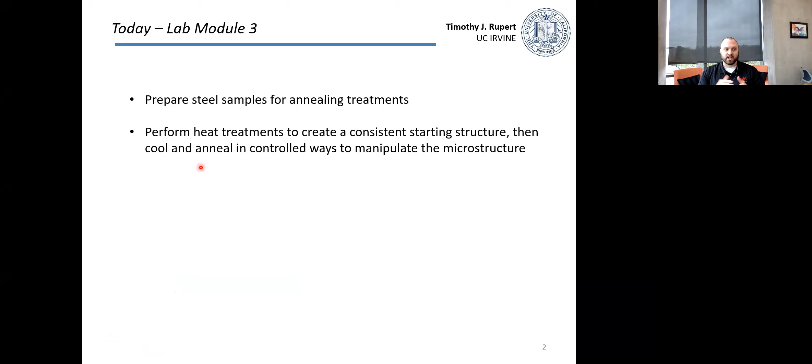So we're going to do this austenization treatment and make them all the single phase FCC material. And then we're going to cool and anneal in different but controlled ways to manipulate the microstructure. So first, in terms of the sample preparation, I just wanted to clarify the procedure that we're using. It's identical to what we did in our last experiments on the aluminum copper alloys.

So we have these chunks of steel. I'm showing little pictures of them on the left. This was just, again, this 1-inch diameter bar. It was a long bar. I cut it with a bandsaw, and that's a good place to start from, but we need to do a few things. On the right here, I'm showing this from the top down. We're looking at the surface, and then from the side, we can see that it's rectangular.

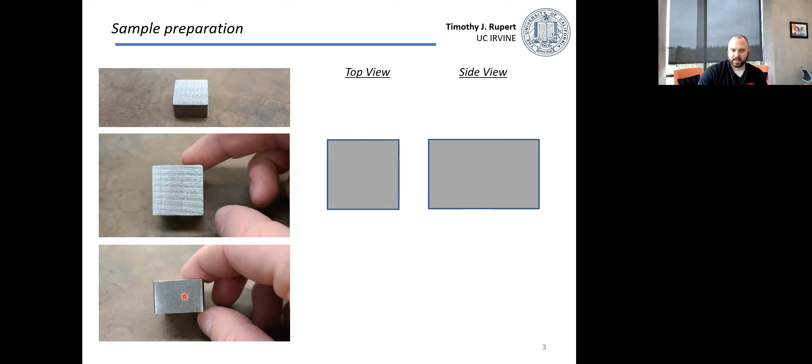All right. The first thing we need to do is polish this face. This is pretty rugged, and that's just how the saw cut it. We want to have a nice smooth surface so that we can do things like measure hardness and also etch that surface to look at the microstructure. Now, to help me get that nice polished surface, I'm also going to polish these edges, these corners in this picture on the right here.

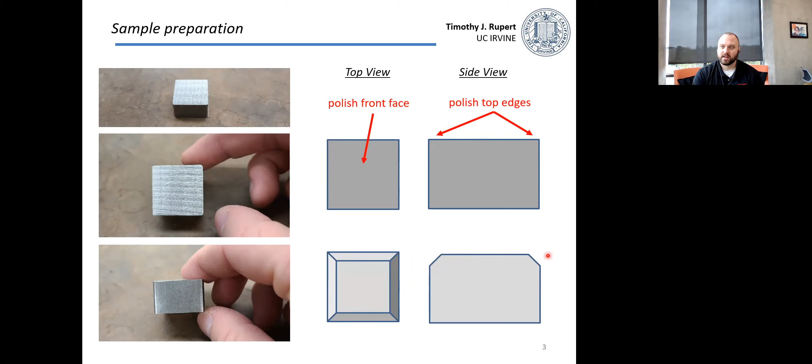The idea here is that I want to be able to smoothly wear away material from that surface, and it's very hard if I have a sharp edge at the side. Some material will get dragged along there, and I won't be able to get a nice surface. So what I'm really trying to do is have a sample that looks a little bit different. It doesn't just look like this rectangular prism shaped chunk. I'm beveling those edges. Here I can see it from the top and also from the side, so that I can then polish the sample and get a nice smooth surface.

Okay. So I'm actually going to show you a few videos of this. I'm trying to combine it all in one video at the end. So on slide 9, when you click the link, the first part of the video will show you me polishing this. And one thing that comes up compared to our aluminum is that steel likes to rust. So we have to be very careful when we polish. We're using water to lubricate that process. We want to make sure that we don't leave water on the surface and allow that to corrode.

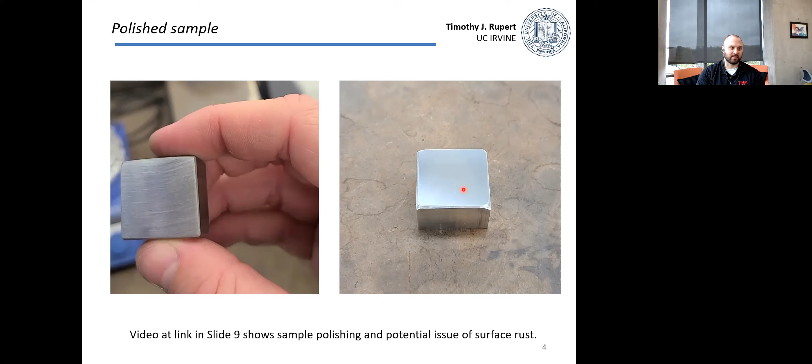Okay, so getting to our heat treatments, just a reminder, we're going to target 3 microstructures. We're going to heat everything up in this temperature range where it wants to be austenite. We're going to take one sample, cool it down a little bit, but hold it at a relatively high temperature so that we get a pearlite structure. We're going to rapidly quench one down to get martensite.

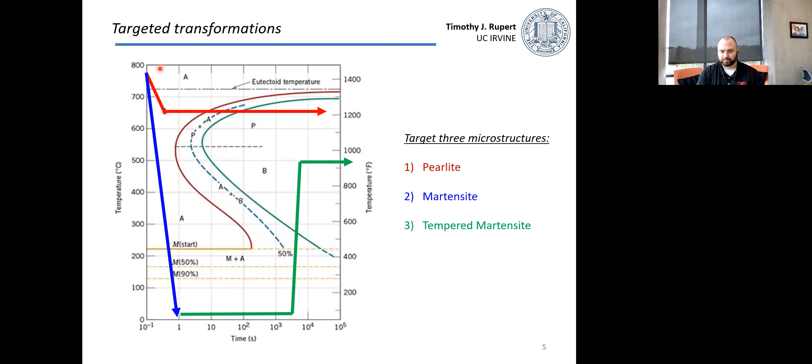We're going to rapidly quench a second one down to get martensite, but then let it do an intermediate temperature heat treatment to get a tempered martensite, to change the properties further. So we talked about all this in our last set of slides. So this is all pretty straightforward. So these temperatures and these times are things we got: the temperatures from the phase diagram, the times from these TTT diagrams.

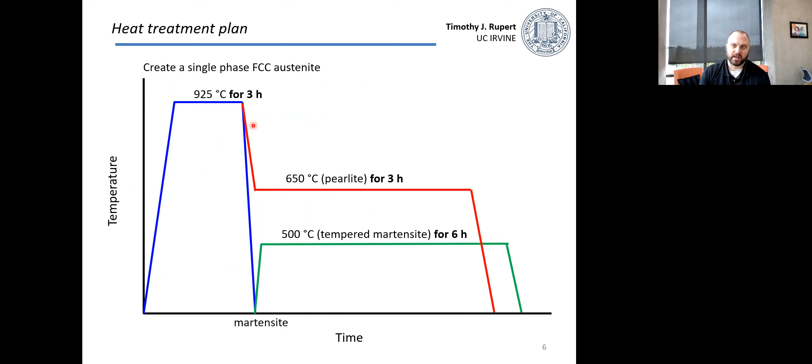The one practical thing we need to talk about today is how do we accomplish some of these things. So for example, the ramp rate at which we heat up doesn't matter that much. It's going to sit at this really high temperature, so it can just sit there forever. It's fine. But the rate at which we cool down in many of these cases is going to be very important, especially in the case of a martensite.

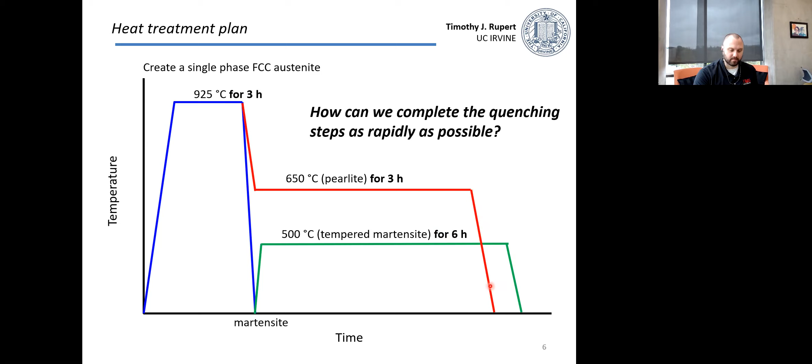So we want to not allow any of those transformations that the phase diagram predicts to happen. So we really need to rapidly quench it down as fast as possible. We want this curve right here to be as close to vertical as possible. And that's also generally true for after we do our pearlite and tempered martensite annealing treatments. We want to very rapidly quench these down and have a really high slope at the end. Okay. So we need to think about doing that.

And the first thing we can play with and change is our quenching medium. So what's the system and material we're going to use to bring that sample down from the high temperature? Generally, people want to use different liquids. So you could put your solid metal in this liquid and cool it down. But you have lots of options. You could really use any sort of liquid. And people do use things like oils and polymer blends to cool things down.

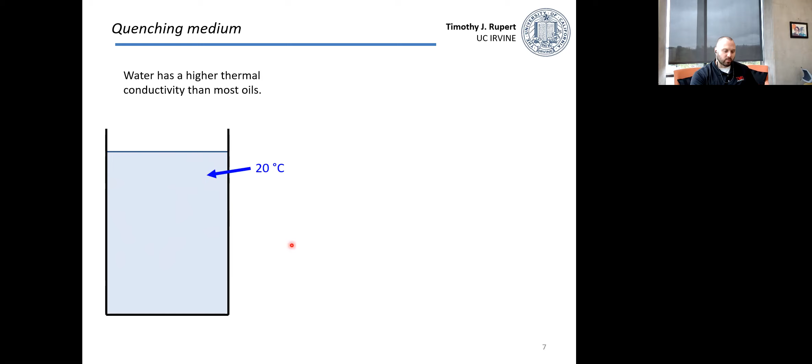But it turns out if you want to very quickly cool down, water is one of the best things you can use. So compared to different oils and things like that, it has a much higher thermal conductivity. Okay, so the basic starting point we're going to take is have a bucket of water, room temperature, and we're going to try to cool down to room temperature using that as our quenching medium. Now, there's some interesting complications that happen.

So we're taking a part that's above 900 degrees C, and we're putting it into this much cooler liquid. So that liquid does want to equilibrate and draw out the heat. But the one problem we could run into is the fact that this temperature of this sample is so much higher than the temperature at which liquid water becomes a vapor.

Okay, so just like we had a phase diagram for these different metals, we can have a phase diagram for water. And you can go and pick out that at 1 atmosphere, so normal environment, the vaporization temperature for water is 100 degrees C. So this is boiling point.

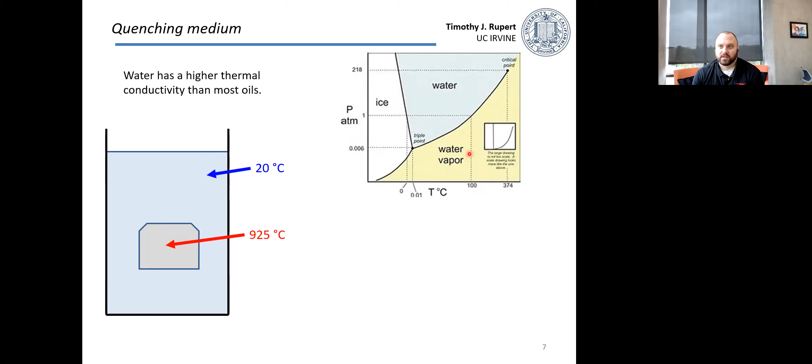The reason that matters is that this sample with a much higher temperature can result in something called the Leidenfrost effect. So the basic idea is if you have a very, very hot surface and you put a droplet of any liquid, in this case water, near it, that piece of the liquid that's touching that hot surface can very rapidly heat up, and it can go over that temperature at which the evaporation happens. So what can happen is you end up getting a barrier layer of water vapor that separates that hot solid surface and that liquid droplet, okay?

So what really happens is if I just put in my really hot piece of metal, I'll actually get this insulating layer of the water vapor surrounding my metal, okay? That by itself isn't that bad, but if we remember that we want to rapidly cool this down, that can delay things.

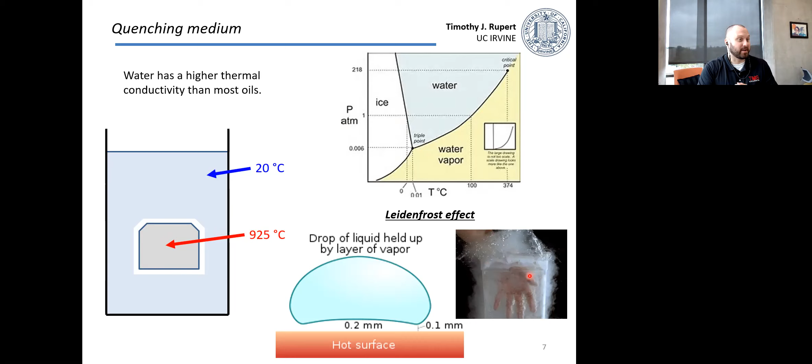So it can keep us from extracting heat in the fastest possible way, okay? Just to draw a sort of real life analogy, this is why you can put your hand into liquid nitrogen. You probably don't want to leave it there for a long time, but the reason that works is that your hand is going to create a vapor layer around it, rather than be touching the actual liquid and getting your hand cooled down to liquid nitrogen temperatures.

So there's actually different cooling stages you can think about in water. You can have this Leidenfrost effect where you have a water vapor bubble around your sample. What you would really like to do is break that up so that you're very rapidly extracting heat from the sample as you're changing liquid water to vapor, but you end up having a bunch of bubbles coming off rather than an insulating layer, okay?

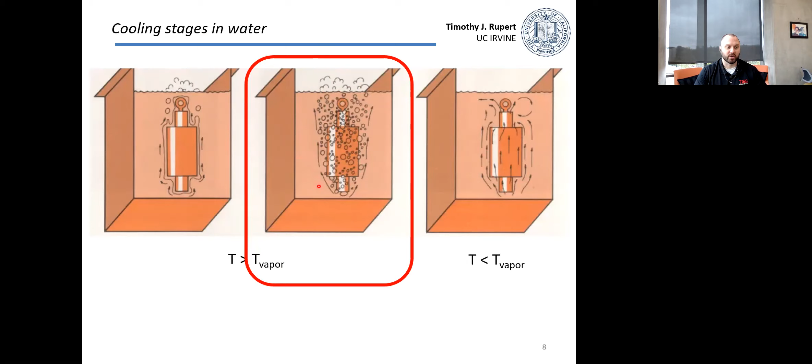Now, eventually, when the temperature of your sample gets below the temperature at which your water becomes a vapor, then you just have convective cooling of the sample. So the water, which is a lower temperature, is just extracting heat in the liquid state, okay? So of these, we're really going to worry about the left side. So what happens at the very high temperatures? What we want to do is promote this middle type of reaction where we don't have a full layer around our sample, and we're rapidly extracting heat.

We can do this a few different ways, and we're going to actually follow 2 different techniques. The first thing is we're not going to quench our sample in regular water. We're actually going to do salt water. The reason for this is that the salt in this solution, so another single phase region of a phase diagram, in this water solution can end up breaking up the formation of these big bubbles. Okay, so it's going to get us closer to that middle point.

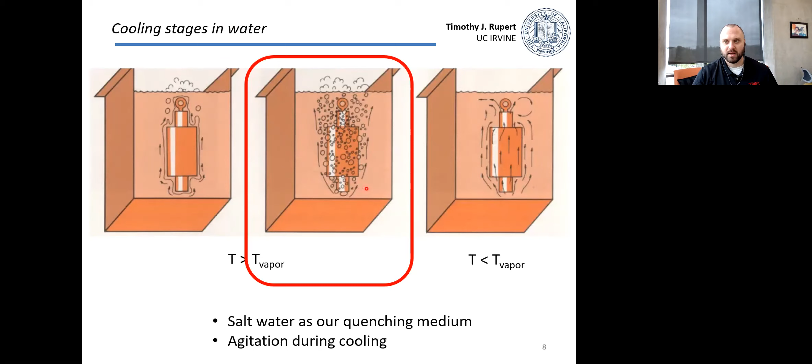Now, the other thing we're going to do is agitate our sample. So rather than just taking our sample and putting it into the bucket of water, I'm going to take it and move it around to try to sort of mechanically dissipate this Leidenfrost effect as well.

All right. So at this point, you can go and click on the link, either on our homepage in Canvas or on the slides that I'll post. I'm going to go through how I made the sample, show you the idea of the surface rust being a problem. I will then do the different heat treatments.

One thing I want to point out, I talked about it in the videos though, is that we're going to a lot higher temperatures. Before we were only going up to a few hundred degrees. Now we're talking about doing experiments at above 900 degrees C. So you'll see that I'm going to have extra safety equipment on. I'm going to take some extra precautions and have it so I'm not even holding the camera. And you'll even see our samples, when they're annealing above 900 degrees C, are actually white hot. So they even look different. They're emitting light in that type of temperature range.

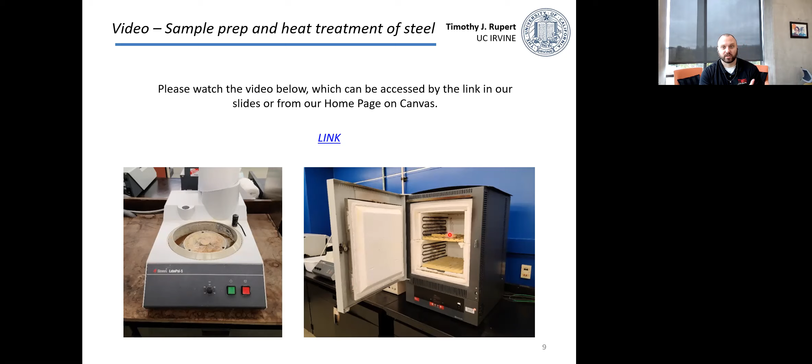Okay. Now, at the end of today, we'll have made all of our samples, done the different heat treatments, and then we'll have 3 different microstructures. Then in the next 2 weeks, we can go in and look at their mechanical properties with hardness, and then also do etching of the surface to try to image and understand the microstructure that we get. Okay, so go watch the video.